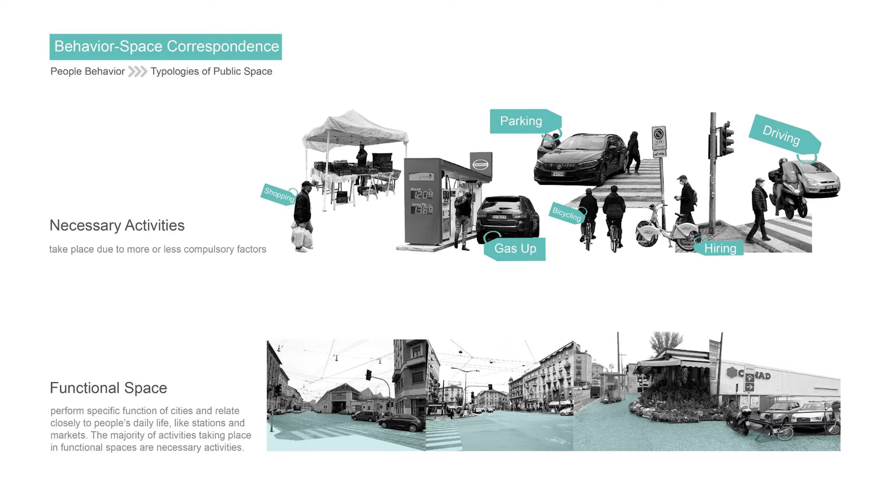Functional spaces, like stations and markets, are where the majority of these activities take place. Optional activities are participated in if there's a wish to do so and if time and place make it possible. In this case, social spaces can be described.

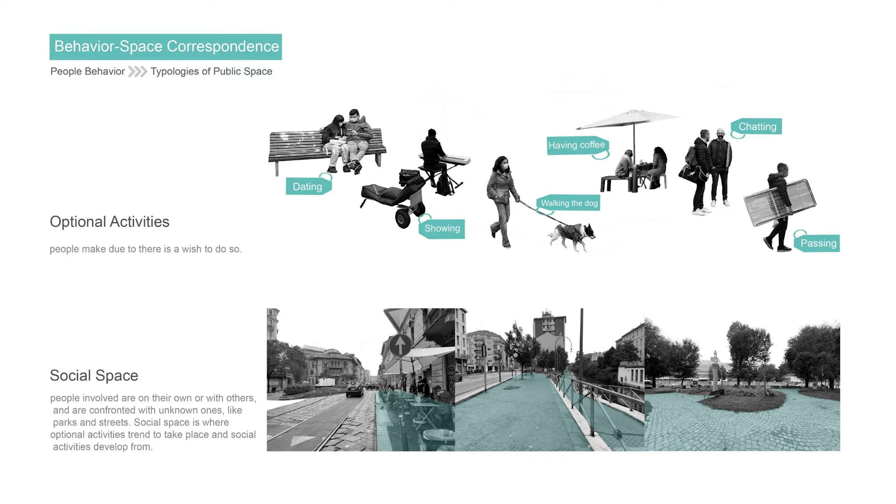People go to these spaces on their own or with others and are confronted with unknown ones. Social activities include children at play, greetings, communal activities, and passive contacts, which is simply seeing and hearing other people.

In experiential spaces, by doing leisure activities in public spaces, people connect to a certain space as well as to the other people who use it.

Our research region is composed of several different cities. In our analysis, the central space of each region is the area which reflects the difference of public service, functions, and complexity.

So we study each region from the PGT maps of land use, urban spatial structure, and urban activity summary, trying to form a map of central spaces of the research region.

For the north part of Milan, we refer to the maps of land use and building functions, and we found that the central places of this area have already been defined in the PGT map.

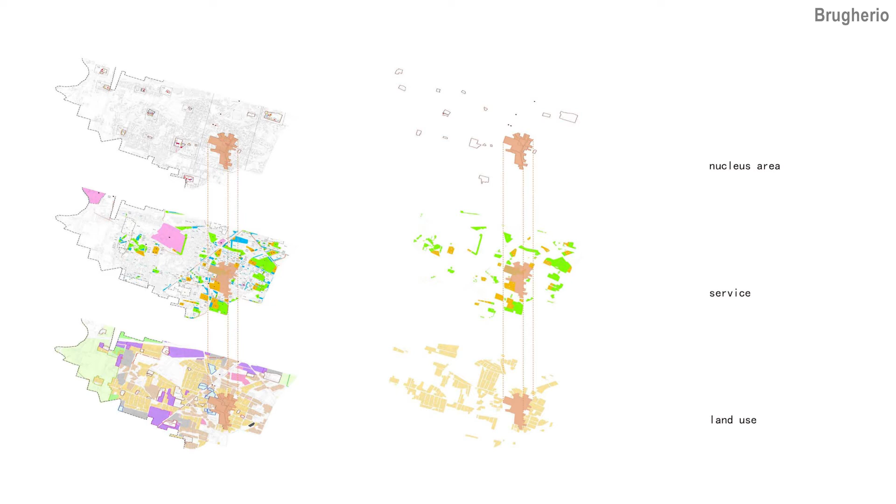Taking the axis extended from Milan and the metro line into consideration, we selected 4 typical places for more in-depth study.

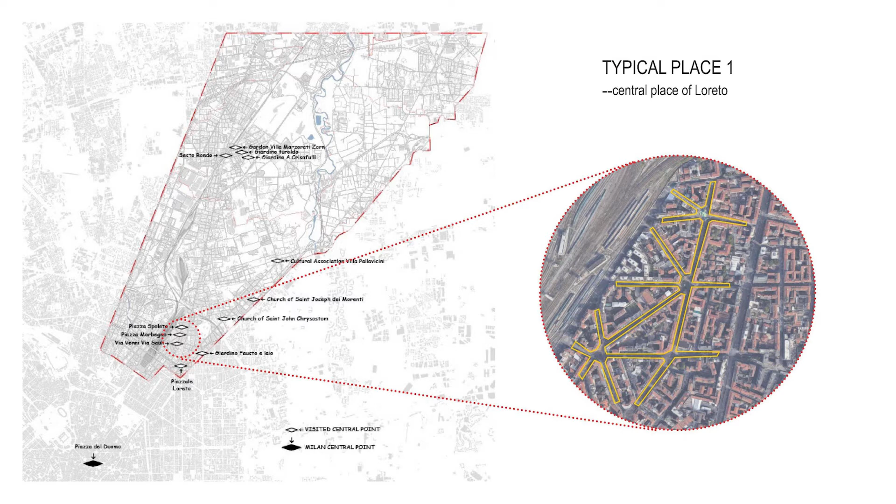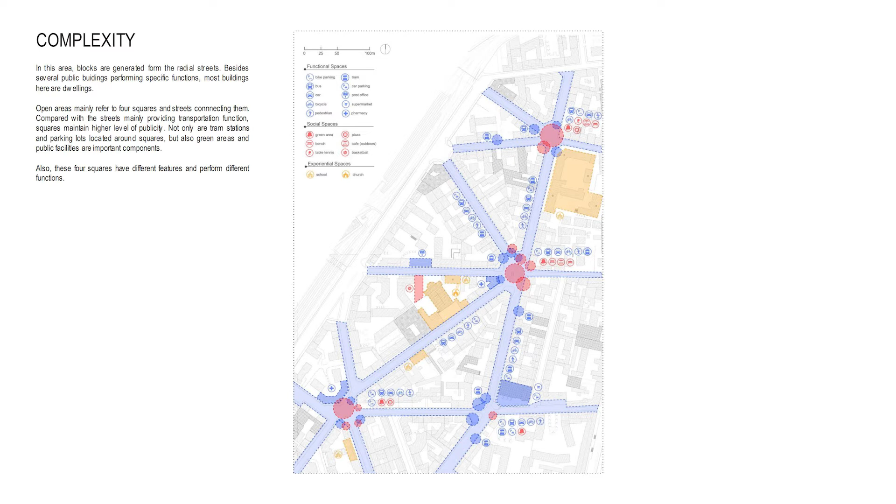The first typical place is part of the central area of Loreto. Open areas here mainly refer to the four crossings and streets connecting them. Compared to the streets, crossings provide much more public service, not only tram stations and parking lots, but also green areas and outdoor facilities.

The first one is Piazza Spoleto. A middle high school is located at the corner. This plaza is surrounded by trees, benches, and sport facilities.

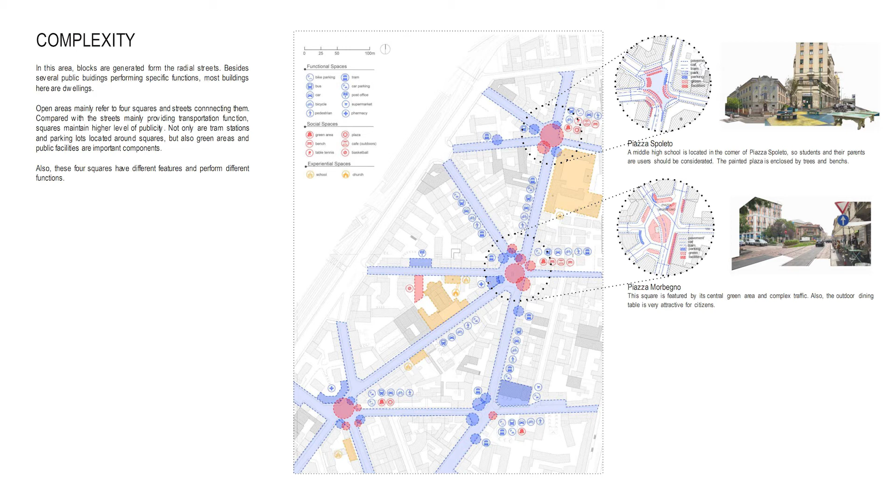The second one is Piazza Morbegno. This square is featured by the central garden and complex traffic conditions. Also, the outdoor dining tables are very attractive.

The third one is a traffic intersection. There are many parking lots serving people who go to the nearby area for shopping. Social functions here are less performed than transportation.

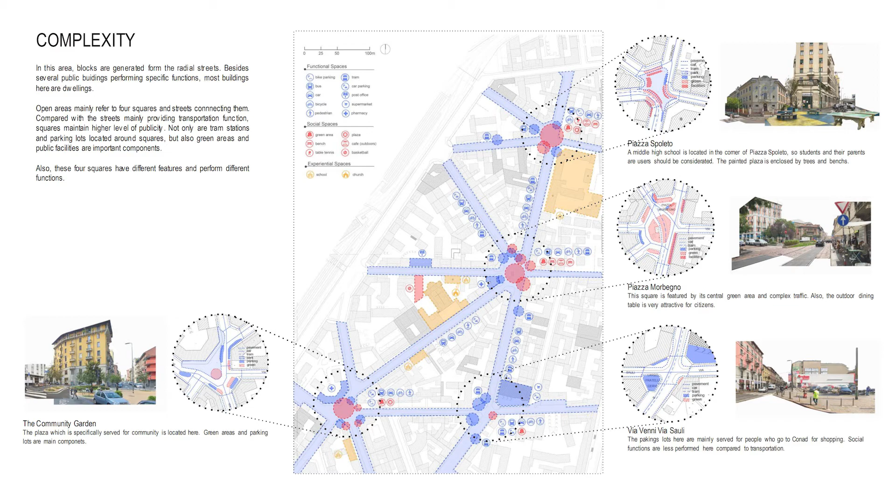The last one is a community garden. This plaza serves people who live here. Green areas and parking lots are the main components.

Then here comes the video we have taken inside.

Then it comes to the vitality pattern. We could say this heat map is kind of matching the complexity we mentioned before. The four crossings and parts of streets show higher vitality, especially the second square, Piazza Morbegno.

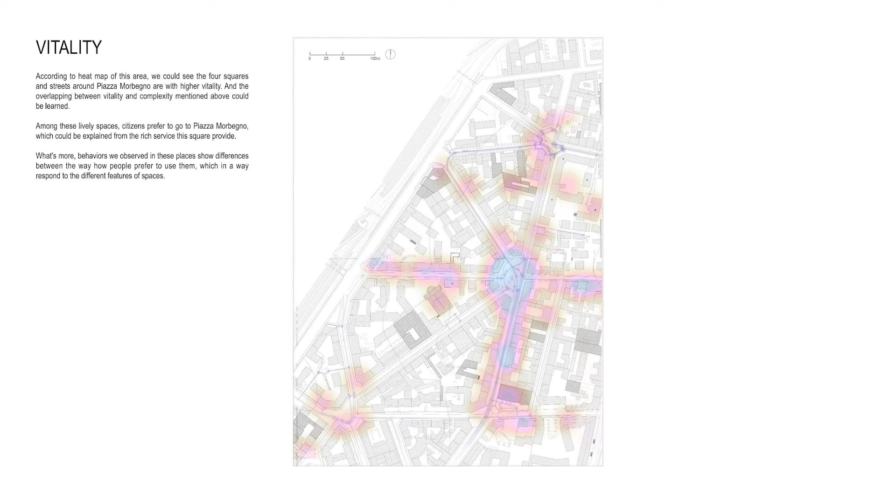Moreover, people's behaviors in different spaces show different features. For example, people would like to spend more time in the first and second plazas, making conversation or having lunch together.

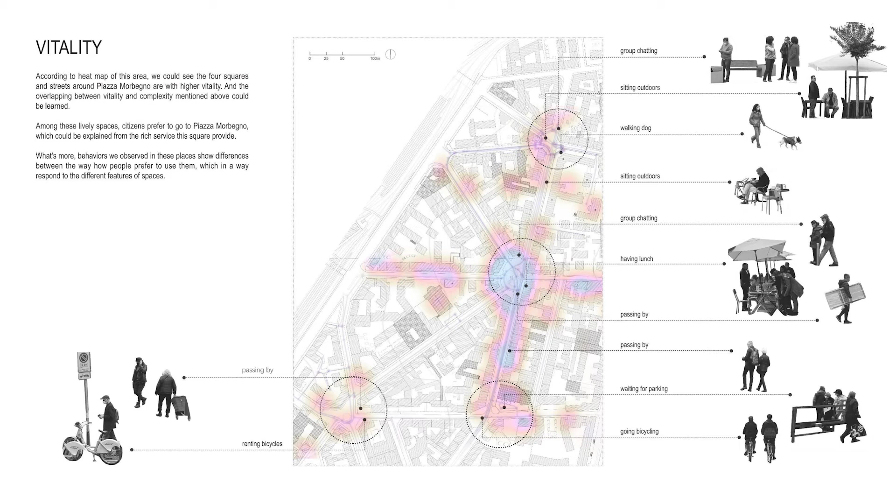The second typical place is one of the central places of Sesto San Giovanni. The main public space is made up of two squares and one street connecting them.

The first one is a square where the subway station is located. It supplies citizens with small shops selling newspapers and flowers, trees and benches.

The other one is in a much smaller scale. It is surrounded by residential buildings and various shops. Plenty of greenery and benches are also provided.

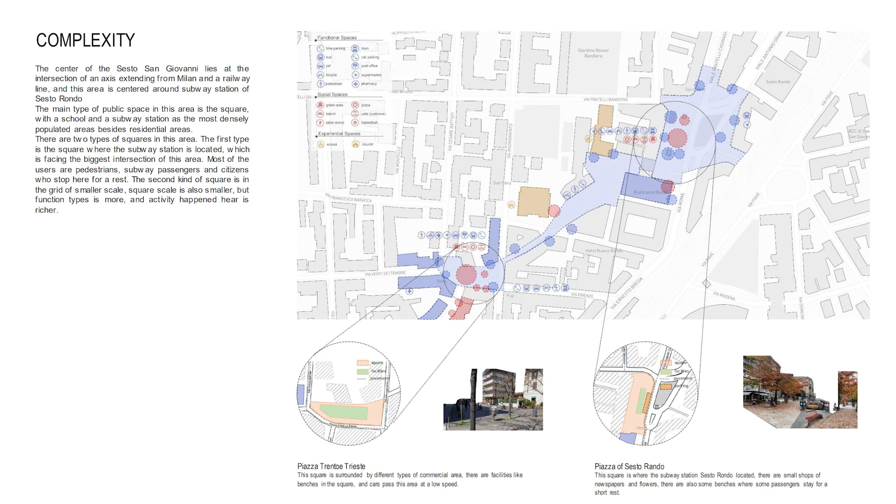We can read from the heat map that the vitality of these two squares is higher than others, and the second one is at a much higher level.

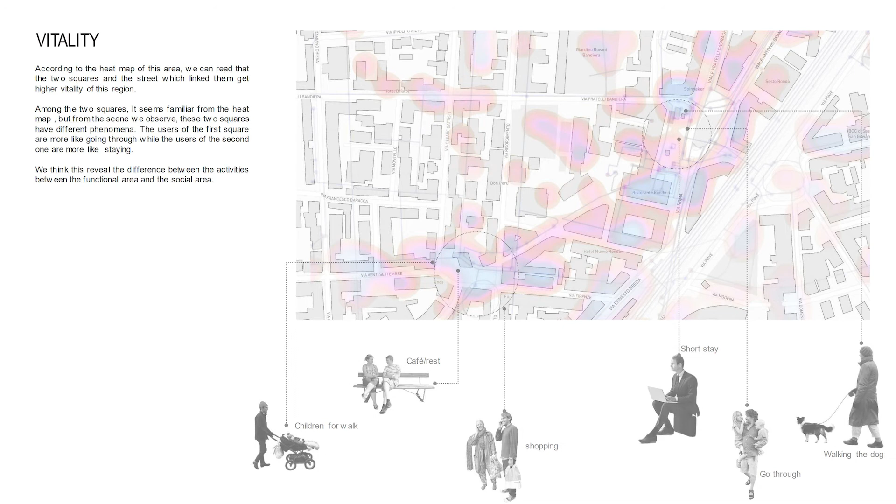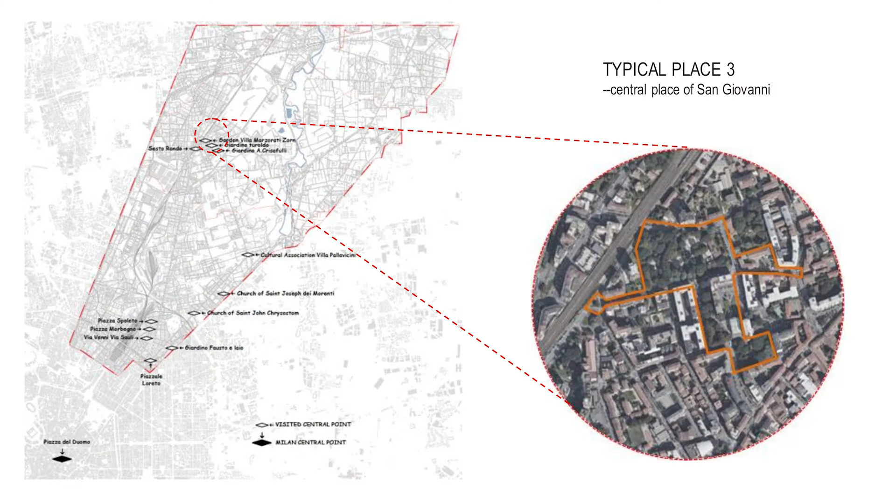Considering what we observe at the scene, users of the first square are mainly passengers from the subway and citizens who go through quickly, while the other square allows its users to do some shopping or have some coffee, which makes them stay a long time. The third typical place is on the other side of the railway line.

This area is centered by the town hall of Sesto San Giovanni. There are two different scales of public green area, Central Park and Community Garden. There is also a square near the town hall, which is our first point.

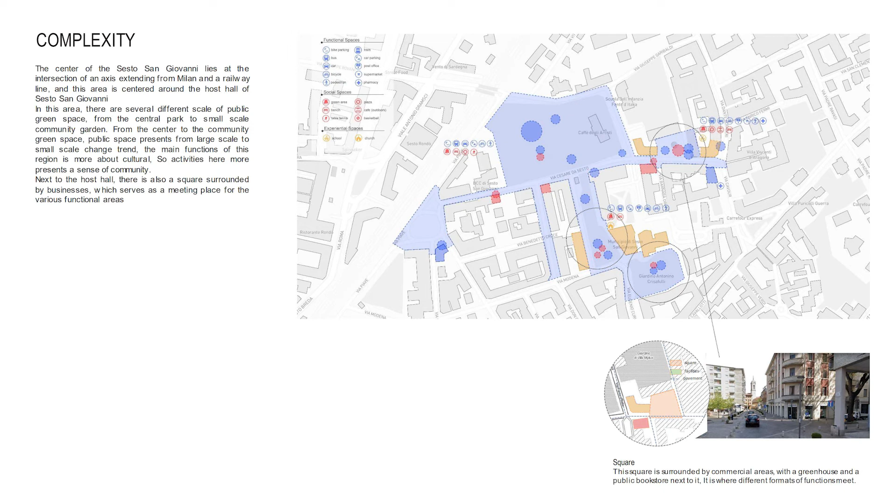It is surrounded by a commercial area, public library, and a greenhouse. The second one is a community garden with specific facilities for children, and the last one is a small community garden close to the residential area.

According to the heat map, squares, architecture with specific surfaces, and greenland with facilities seem to get higher vitality.

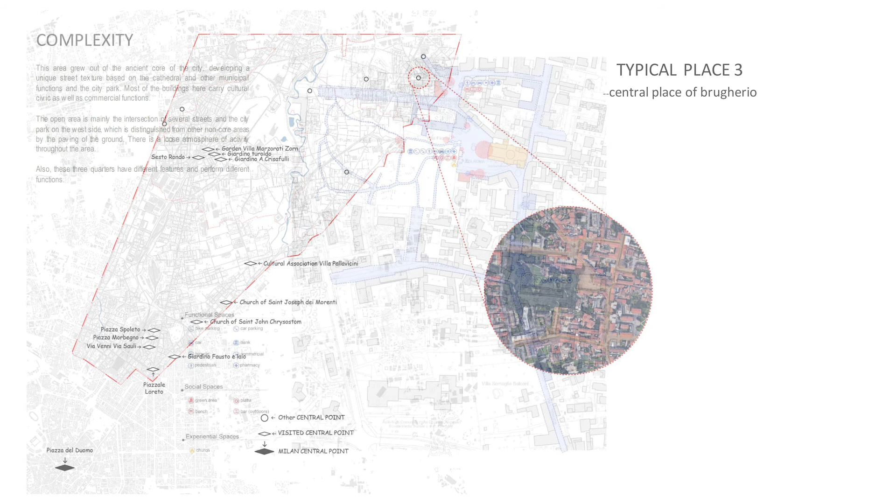Then the central space of Brugherio is located in the northeast of the territory. Unlike the former ones, this space has been developing on the basis of historical nuclei, which also affects its fabric. There are mainly three active areas here, which are distinguished from others by the brick paving.

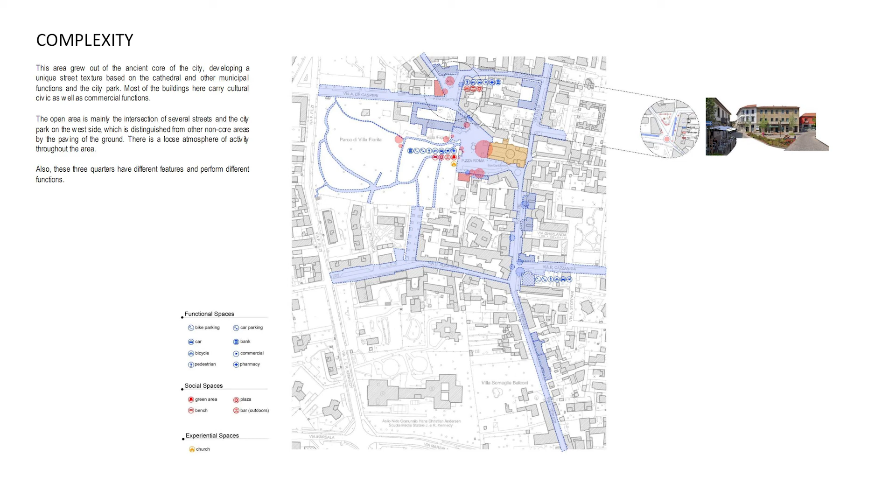First is a small plaza on the north side. We could see some red marks and blue marks referring to different types of spaces, like bars, banks, and some stores. The main traffic approaches here are walking, cycling, and also driving.

Thirdly, it's more like an expansion of the former open areas. There are only some functional spaces here. People would not stay here for too long. With the activity map, there are some connections between complexity and vitality.